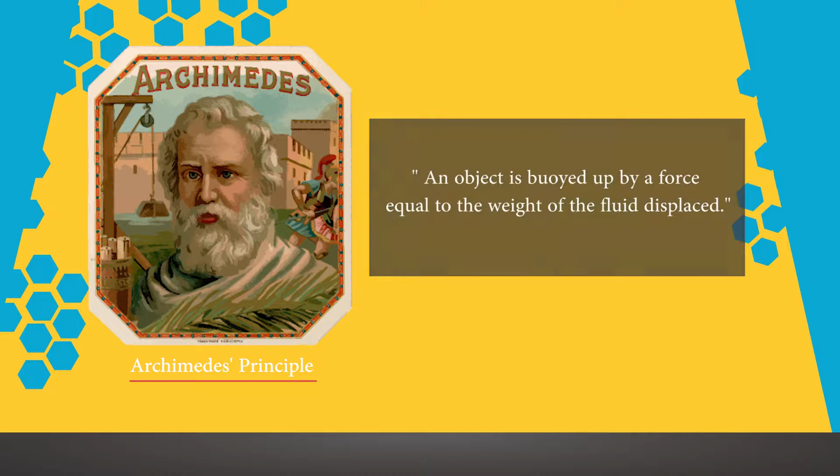So everybody, welcome back again. Lesson 6. Fluid Mechanics. An object is buoyed up by a force equal to the weight of the fluid displaced. Archimedes' principle. Objective: to understand the basic concepts of fluid mechanics. Why study fluid mechanics? The primary reason is not even technical, it is cultural. A physicist is defined as one who looks around and understands at least part of the material world.

Fluid mechanics is encountered in almost every area of our physical lives. Blood flows through our veins and arteries. A ship moves through water and water flows through rivers. Airplanes fly in the air and air flows around wind machines. Air is heated and cooled in our homes, and computers require air to cool components. All engineering disciplines require some expertise in the area of fluid mechanics.

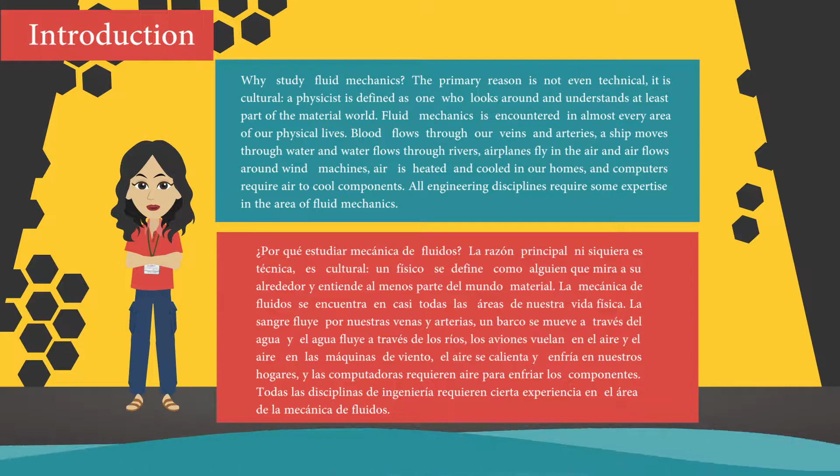Fluid mechanics. Fluid mechanics is a branch of physics concerned with the study of liquids, gases, plasmas, and the forces on them. Fluid mechanics has a wide range of applications, including mechanical engineering, civil engineering, chemical engineering, biomedical engineering, geophysics, astrophysics, and biology. Fluid mechanics can be divided into three divisions.

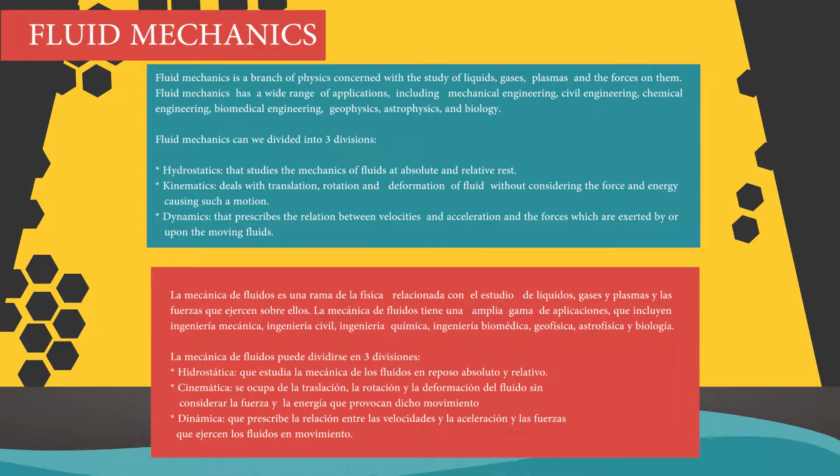Hydrostatics, that studies the mechanics of the fluids at absolute and relative rest. Kinematics deals with the translation, rotation, and deformation of fluid without considering the force and energy causing such a motion. Dynamics, that prescribes the relation between velocities and acceleration and the forces which are exerted by or upon the moving fluids.

The history of fluid mechanics. The science of flow has been classified into hydraulics, which developed from experimental studies, and hydrodynamics, which developed through theoretical studies. In recent years, however, both have merged into the single discipline called fluid mechanics.

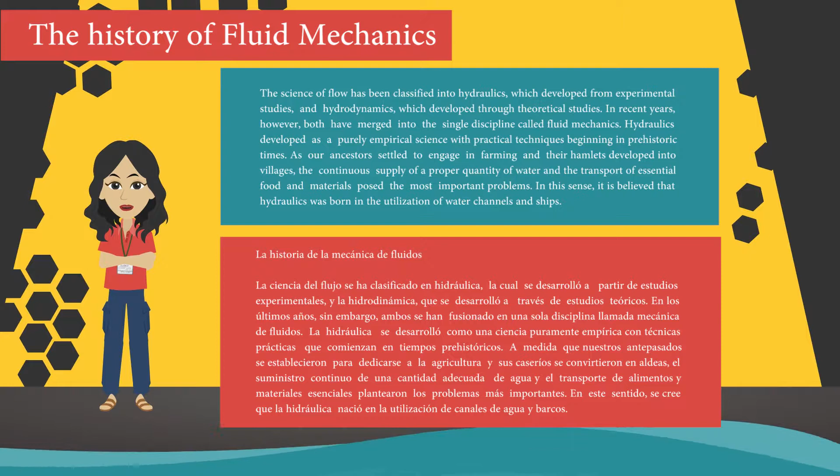Hydraulics developed as a purely empirical science with practical techniques beginning in prehistoric times. As our ancestors settled to engage in farming and their hamlets developed into villages, the continuous supply of a proper quantity of water and the transport of essential food and materials posed the most important problems. In this sense, it is believed that hydraulics was born in the utilization of water channels and ships.

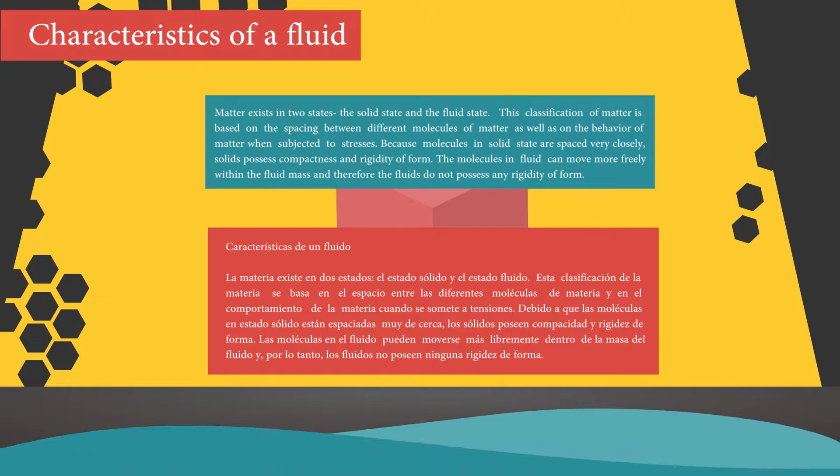Characteristics of a fluid. Matter exists in two states: the solid state and the fluid state. This classification of matter is based on the spacing between different molecules of matter as well as on the behavior of matter when subjected to stresses. Because molecules in solid states are spaced very closely, solids possess compactness and rigidity of form. The molecules in fluid can move more freely within the fluid mass, and therefore the fluids do not possess any rigidity of form. The properties of fluids are viscosity, surface tension, compressibility.

Viscosity. It describes the internal friction of a moving fluid. A fluid with large viscosity resists motion because its molecular makeup gives it a lot of internal friction. A fluid with low viscosity flows easily because its molecular makeup results in very little friction when it is in motion. Gases also have viscosity, although it is a little harder to notice it in ordinary circumstances.

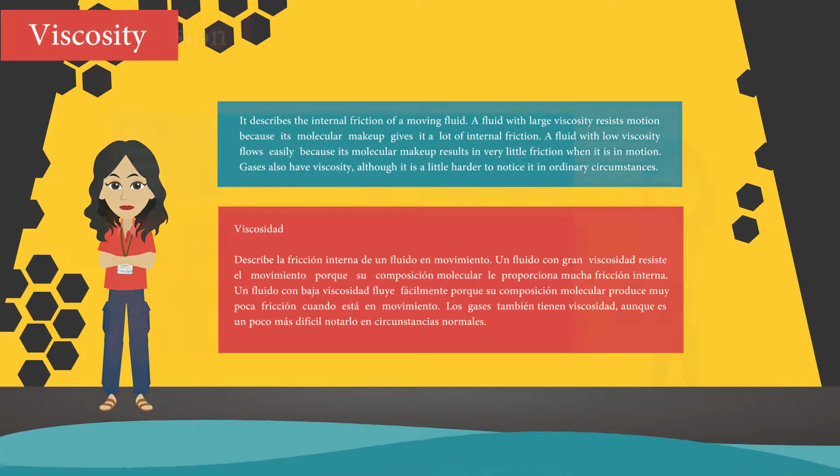Surface tension. Surface tension is a contractive tendency of the surface of a fluid that allows it to resist an external force. Surface tension is an important property that markedly influences the ecosystems. Whenever a fluid is left to itself, the fluid tends to attain the minimum surface area possible.

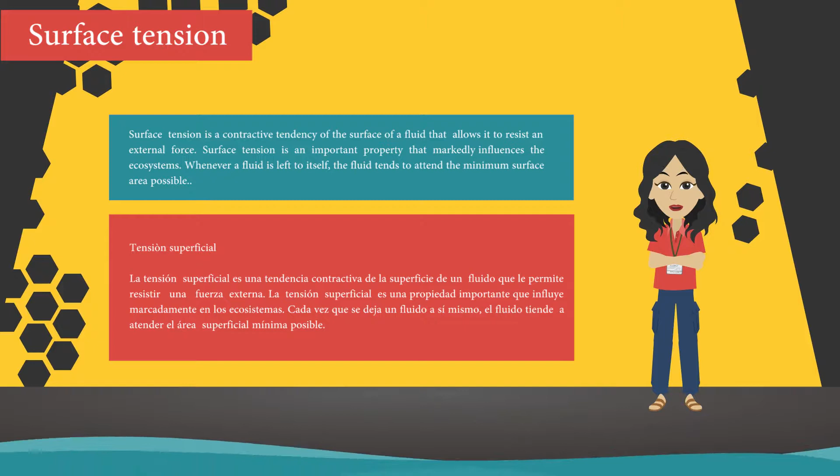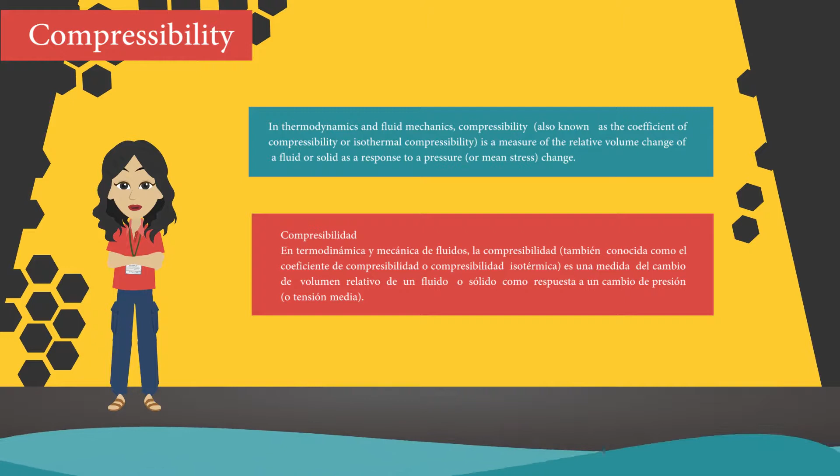Compressibility. In thermodynamics and fluid mechanics, compressibility, also known as the coefficient of compressibility or isothermal compressibility, is a measure of the relative volume change of a fluid or solid as a response to a pressure change.

There are two branches of fluid mechanics. Fluid statics or hydrostatics is the branch of fluid mechanics that studies fluids at rest. It encompasses the study of the conditions under which fluids are at rest in a stable equilibrium. Hydrostatics is categorized as a part of fluid statics, which is the study of all fluids, incompressible or not, at rest.

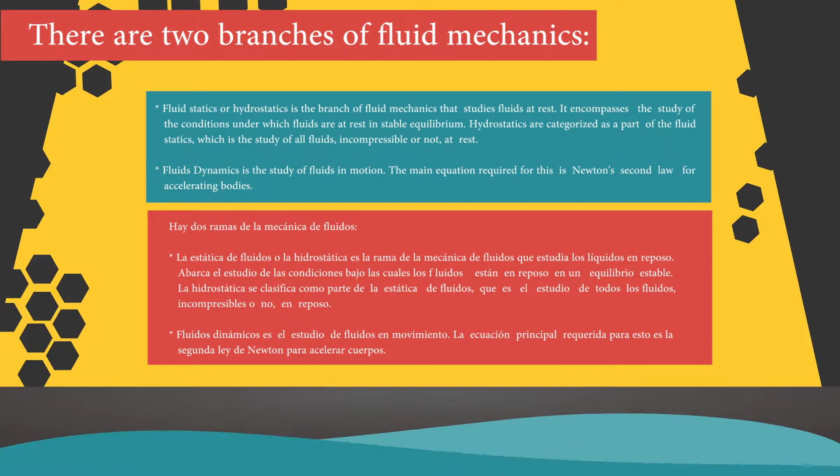Fluid dynamics is the study of fluids in motion. The main equation required for this is Newton's second law for accelerating bodies. Expressing fluid pressure in terms of a vertical liquid column makes perfect sense when we use a very simple kind of motion balance pressure instrument called a manometer.

A manometer is nothing more than a piece of clear tubing filled with a liquid of known density situated next to a scale for measuring distance. The most basic form of a manometer is the U-tube manometer. Types of manometer. Piezometer. Piezometer is the simplest form of manometer which is tapped into the wall of a pressure conduit for the purpose of measuring pressure.

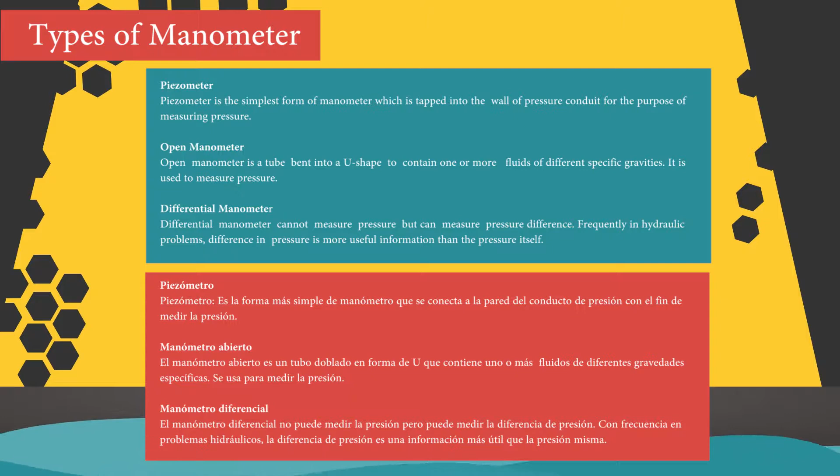Open manometer. Open manometer is a tube bent into a U shape to contain one or more fluids of different specific gravities. It is used to measure pressure. Differential manometer. Differential manometer cannot measure pressure but can measure pressure difference. Frequently in hydraulic problems, difference in pressure is more useful information than the pressure itself.

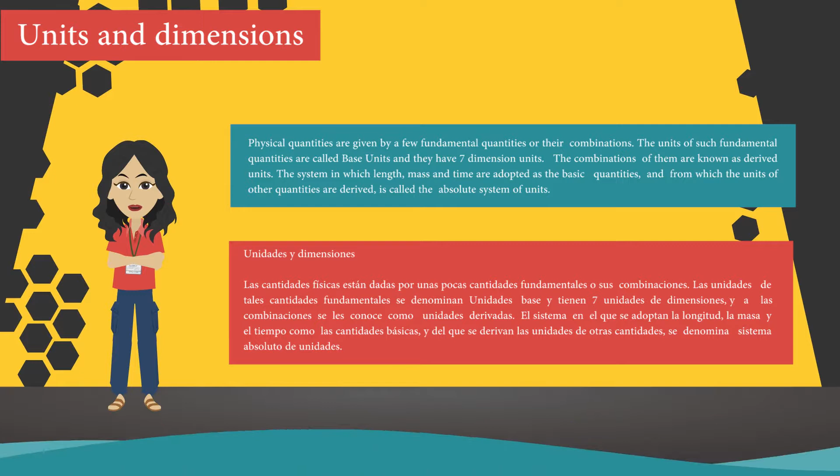Units and dimensions. Physical quantities are given by a few fundamental quantities or their combinations. The units of such fundamental quantities are called base units and they have 7-dimension units. The combinations of them are known as derived units. The system in which length, mass, and time are adopted as the basic quantities and from which the units of other quantities are derived is called the absolute system of units.

Pressure and temperature. In our study of fluid mechanics, we often encounter pressure. It results from compressive forces acting on an area. Pressure measured relative to atmospheric pressure is called gauge pressure. It is what a gauge measures if the gauge reads zero before being used to measure the pressure. Absolute pressure is zero in a volume that is void of molecules, an ideal vacuum.

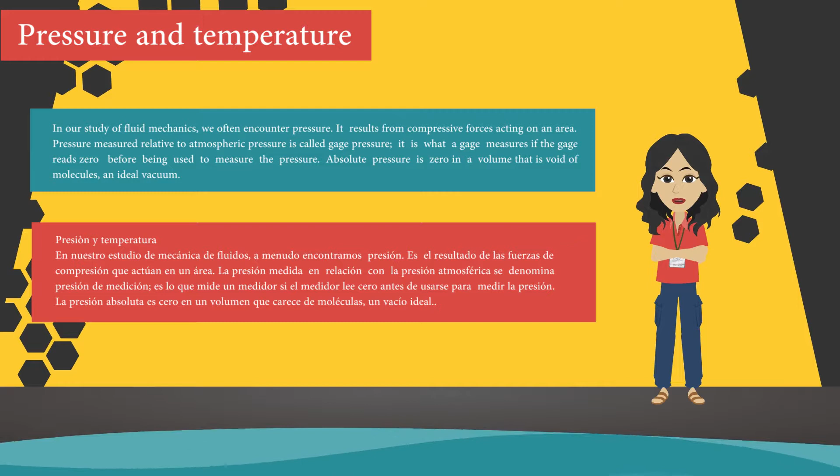Volume and surface forces. Generally speaking, fluids are acted upon by two distinct types of force. The first type is long-range in nature, that is, such that it decreases relatively slowly with increasing distance between interacting elements, and it's capable of completely penetrating into the interior of a fluid. Gravity is an obvious example of a long-range force.

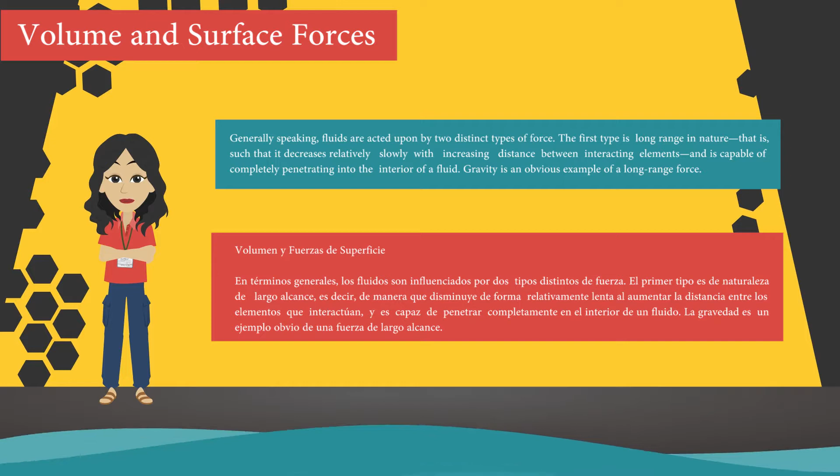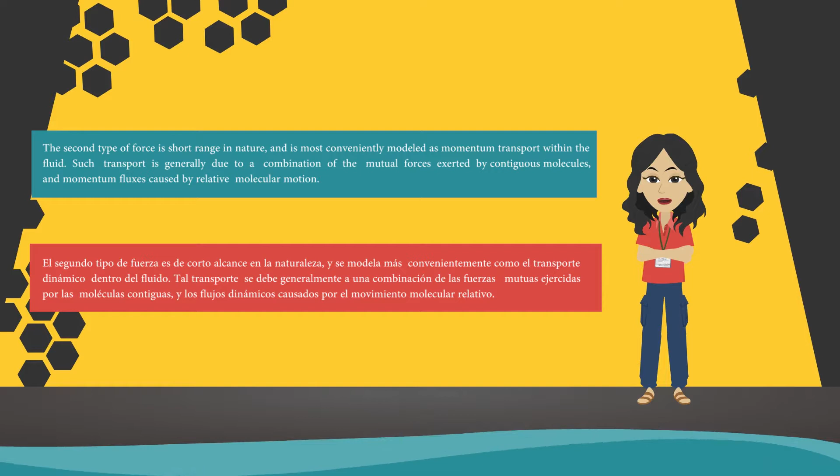The second type of force is short-range in nature. It is most conveniently modeled as momentum transport within the fluid. Such transport is generally due to a combination of the mutual forces exerted by contiguous molecules and momentum fluxes caused by relative molecular motion.

Continuum mechanics. It is a branch of mechanics that deals with the analysis of kinematics and the mechanical behavior of materials modeled as a continuous mass rather than as discrete particles. The French mathematician Augustin-Louis Cauchy was the first to formulate such models in the 19th century. Continuum mechanics deals with the physical properties of solids and fluids which are independent of any particular coordinate system in which they are observed. These physical properties are then represented by tensors, which are mathematical objects that have the required property of being independent of coordinate system.

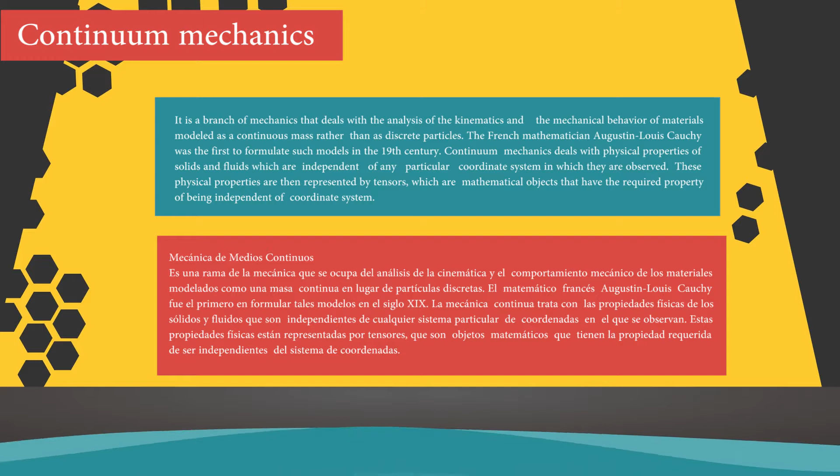Bernoulli's principle. In fluid dynamics, Bernoulli's principle states that an increase in the speed of a fluid occurs simultaneously with a decrease in pressure or a decrease in the fluid's potential energy. The principle is named after Daniel Bernoulli, who published it in his book Hydrodynamica in 1738. Bernoulli's principle can be applied to various types of fluid flow, resulting in various forms of Bernoulli's equation. There are different forms of Bernoulli's equation for different types of flow. The simple form of Bernoulli's equation is valid for incompressible flows.

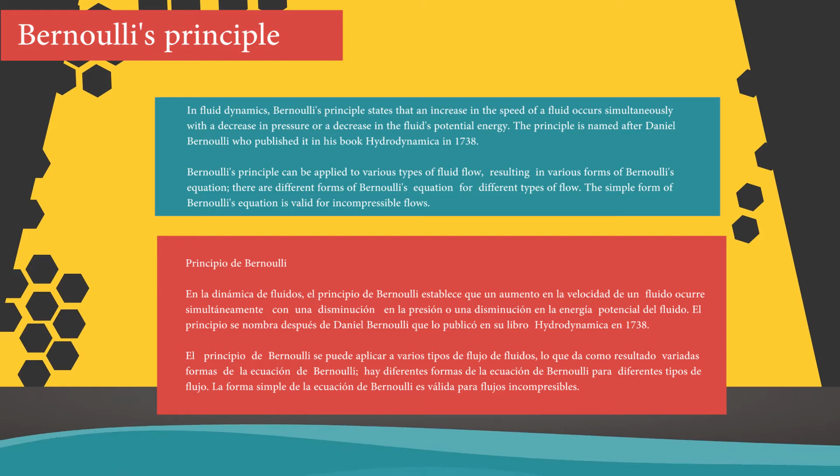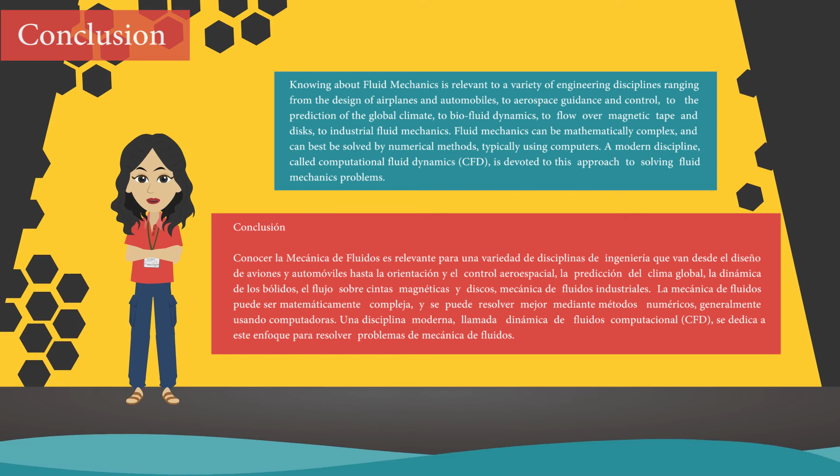Now it's time to do the activities.